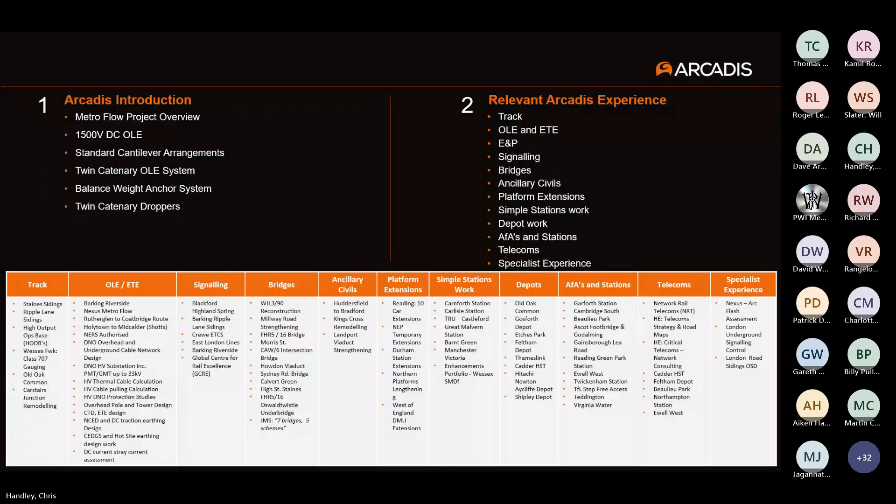Arcadis are experienced in the support of rail infrastructure delivery, providing all design services across all disciplines and stages. This presentation is going to be focused on the light rail project Metro Flow. So Arcadis were commissioned by Buckingham's to produce the Form A, Form B and AFC OLE designs for the Metro Flow project for the main client Nexus.

The role of principal designer was fulfilled by Buckingham's. The line was handed back to Nexus in December 2022 and services have been running since then. The project was named Major Project of the Year at the National Rail Awards and it scooped Outstanding Engineering Achievement at the Global Light Rail Awards. I'll briefly discuss the project aspects of 1500 volt DC OLE and some of the technical challenges we had.

The existing Metro tracks were dualled around the stations, so you can see Hebburn and Jarrow station, and they were dualled at the extents of the site too. So between those areas of dual tracking, the Metro tracks were just a single bi-directional line. The existing OLE in these areas was cabled between the respective OLE switches.

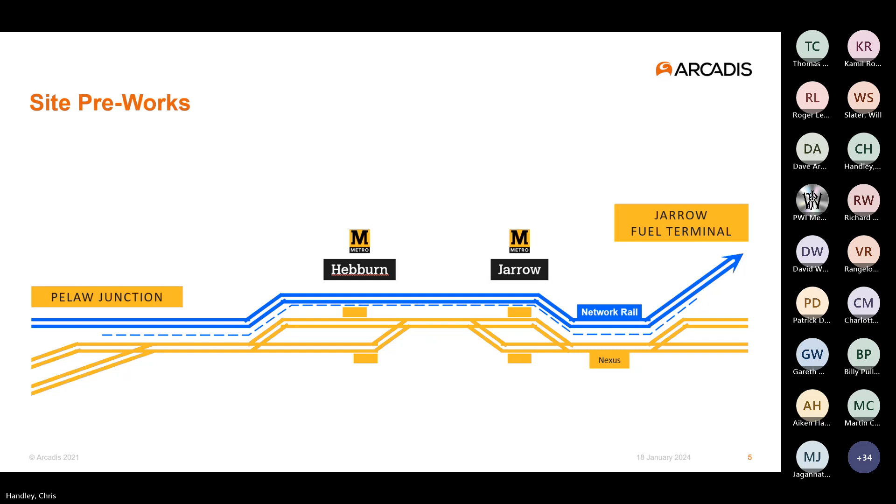For the project, the Network Rail line was to be incorporated into the Metro network to ensure that there is dual track throughout. So now the freight train services which run to the oil terminal would run over the Metro tracks. Five crossovers have been added through the route. This allows the freight train to cross to the other line between the junctions. It also allows for bi-directional Metro operation when the freight train is partially in the fuel terminal, the freight train being so long that when it goes to unload in the terminal, part of it would still be on the main lines.

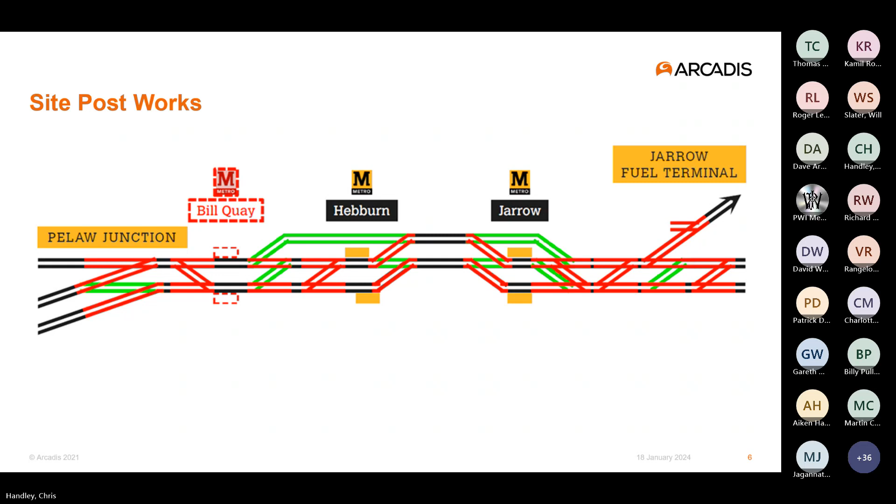So that was one aspect of the project, and another was to increase the system-wide weekday frequency of the Metro services to every 10 minutes. So some of the scope items that we went through for the project. The Nexus existing OLE system is 1.5 kilovolt DC OLE. They've got areas of heavy OLE, which is twin catenary between Pelaw and Hebburn, and then from Hebburn to Bede it was just the standard OLE with single catenary.

We needed to put new OLE over the former Network Rail line, new OLE over the new crossovers, and replace those cabled sections of OLE with aerial OLE. We had to renew the OLE on existing structures, so even if the existing mast and foundation were retained, we replaced the existing cantilevers. There was a slight increase in the OLE scope to include the renewal of the OLE through Bede station. So that just involved replacing the cantilevers and the wires.

To accommodate the freight train, which was W6A gauge, we had to increase the nominal contact wire height through the route from 4 meters to 4.5 meters. This was challenging around some of the low bridges, so we had to fit some of those bridges: Victoria Road, Station Road, which is in between the Hebburn station platforms, and Monkton Terrace. The track lowers at Monkton Terrace to accommodate the OLE were very high, 600 mil, and the track gradient there was like 1 in 65.

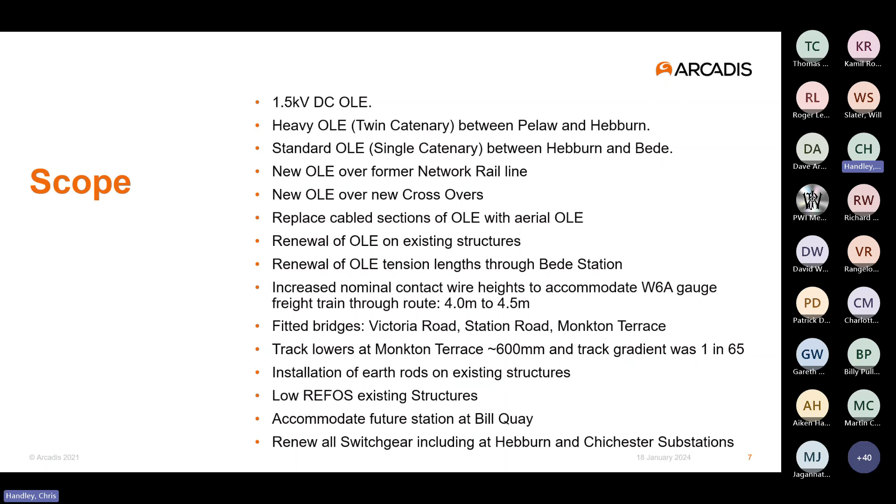Just some project info. So it was about 13 single track kilometres of OLE, 17 wire runs, 114 new structures installed with 48 existing structures removed, and 116 existing structures reused. And the route covered 3 existing stations, which were Hebburn, Jarrow and Bede.

So Nexus have their own set of standards which we needed to work to. So this includes the overhead current collection equipment technical specification, which covers standard OLE parameters, the bonding standard and system earthing policy. The overhead current equipment technical specification covers REFOSs, contact wire heights, grading, electrical clearances, pan sway and other parameters.

I just included there a snapshot of the section on the contact wire heights, which shows the differences between joint user and metro only tracks. So as you can see, the minimum height there where it's exclusively metro vehicles is very low, and we had to raise a lot of the wire heights to fit in the W6A gauge freight train.

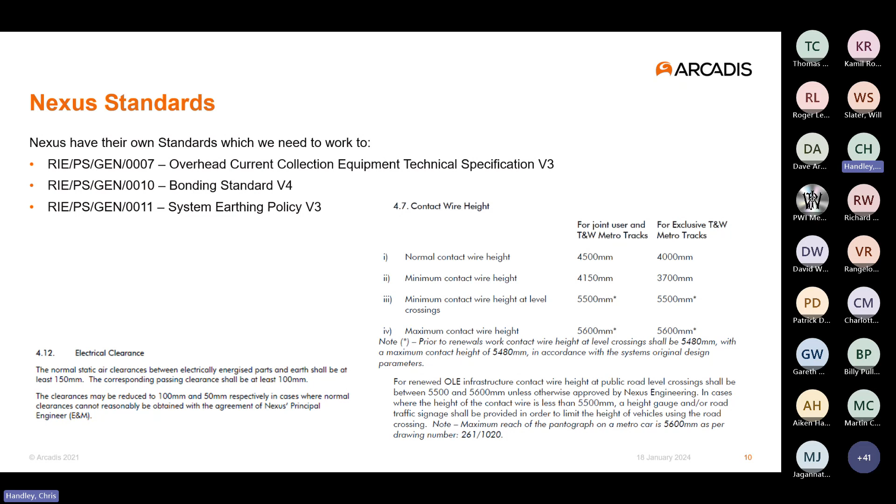So the new OLE that we used on the route was from the Siemens SICAT design range. So the existing Nexus OLE equipment and component record drawings are now obsolete. So we proposed the use of Siemens SICAT LD equipment, which is suitable for 1500 volt DC OLE with both double insulation and twin catenaries. This equipment has also been used recently on the Edinburgh Tram project. And there's just a snapshot from the Siemens product catalogue of one of the 3 kilovolt DC composite insulators.

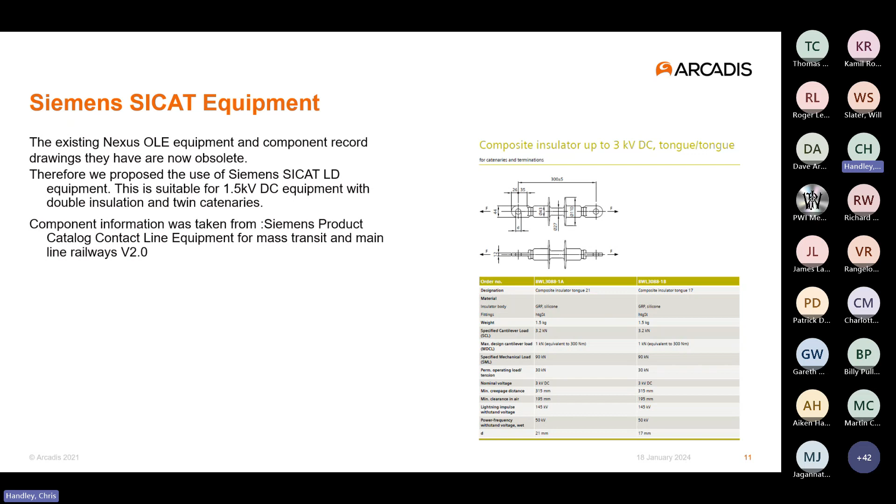So OLE structures can be single or double insulated. So here are 2 examples. The pictures are taken from Gosforth Depot. So single insulation is in the cantilever frame, where in that situation the mast is insulated from the ground and bonded to the traction return rail. So the mast is held in the concrete foundation with an insulated proforma.

So if there was a failure in the single insulation, the fault current would go back to the rail. And it also means that the mast, the OLE structure, is the same potential as the rail. So we were introducing double insulation in the area of works. So there are two ways we achieve this.

So one is you have primary insulation in the cantilever frame. Again, that's just the insulator by the mast, and then secondary insulation in the registration equipment. So this involved an insulated or GRP registration tube and an insulated catenary support. In this case, the mast is then earthed through the foundation, so it's just a piled foundation with the mast directly bolted to it.

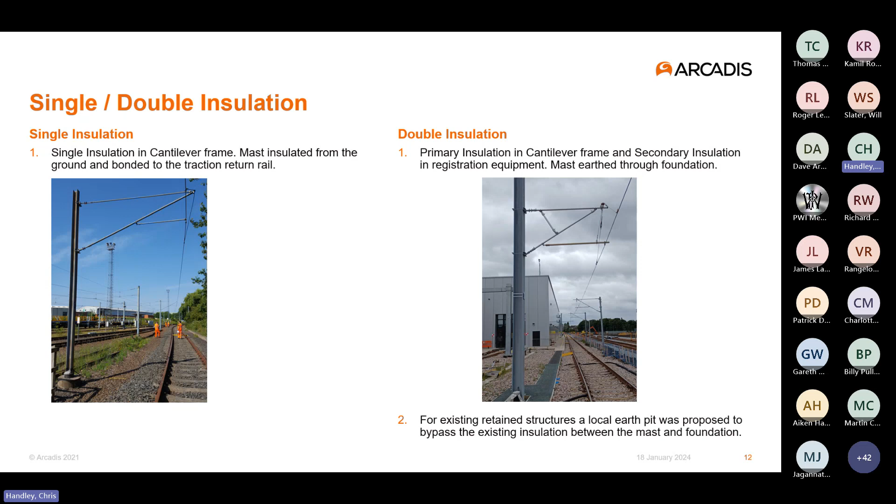So stray currents are another issue in DC systems. DC traction systems can cause stray currents which could adversely affect the railway concerned and outside installations when the feed and return circuits are not sufficiently insulated from earth. The major effect of stray currents is corrosion of metallic structures, where stray currents leave the metallic structure. There's also risk of overheating, arcing, fire, and subsequent danger to persons and equipment both inside and outside the DC electric traction power supply system.

So this is predominantly where some of the return current leaves the rail and would pass through an adjacent parallel metallic structure and then re-enter the rail after that.

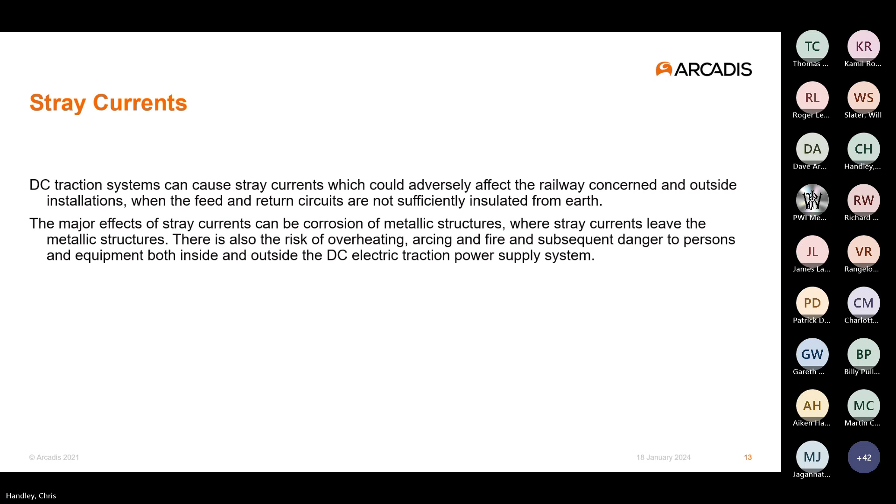So Siemens advised to keep a minimum angle of 1 in 3 in the diagonal tube. Then we drew them up with different back distance values to suit a range of reach values, ensuring clearance to the pantograph. So one of the effects of squashing the cantilever in this way is you need more variations in back distance, which suit a smaller selection of cantilever reaches.

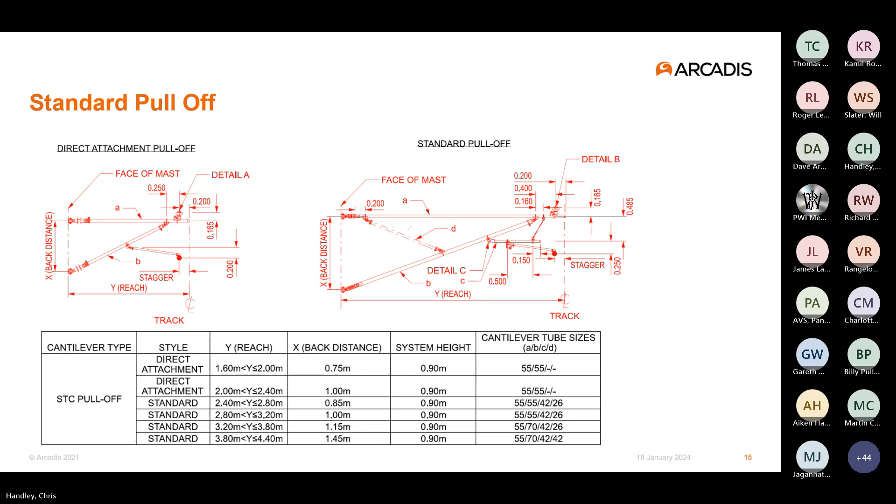And this is the pull-off cantilever arrangement. To ensure the buildability of the cantilevers on the detailed design cross sections, we showed additional details and notes which covered the components of insulator assemblies where the composite insulator wasn't suitable, and additional construction information.

So the cantilever selection details showing the direction of the eye clamps, and they denote, in the single catenary areas, which hole in the twin catenary clamp the single catenary goes into.

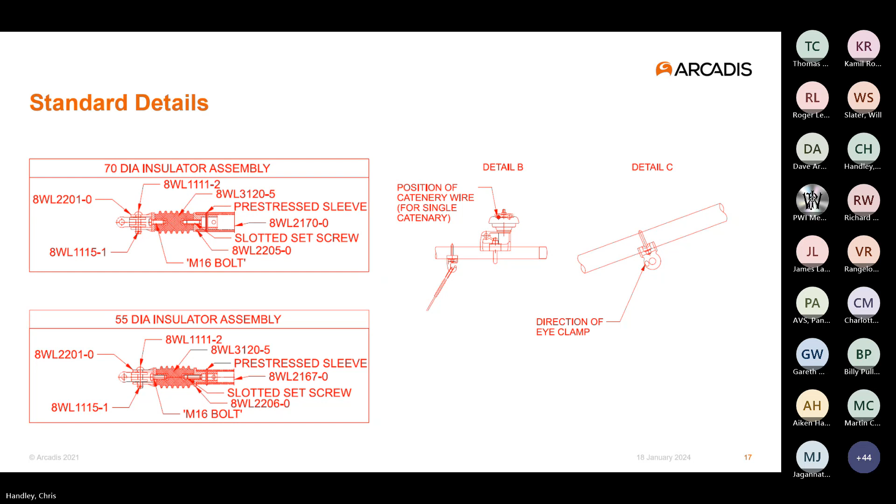So the twin catenary OLE system. We needed to replace the existing Nexus twin catenary OLE equipment. This had an additional catenary wire terminated into the centre of the compensating plate at a reduced tension to increase the current carrying capacity of the OLE. The main catenary and contact wire were nominally tensioned at 11 kilonewtons. However, over time, the tension in the wires has equalised with tensions as low as 5.9 kilonewtons measured in the contact wire.

A recent Nexus renewal project fitted a new termination arrangement to the twin catenary system, which divided the tensions from the existing balance weights slightly differently. So this gave 7.5 kilonewtons in each catenary and 6.5 in the contact wire. This arrangement was deemed not to provide enough tension in the contact wire for purposes of complying with deviation in the longer OLE spans.

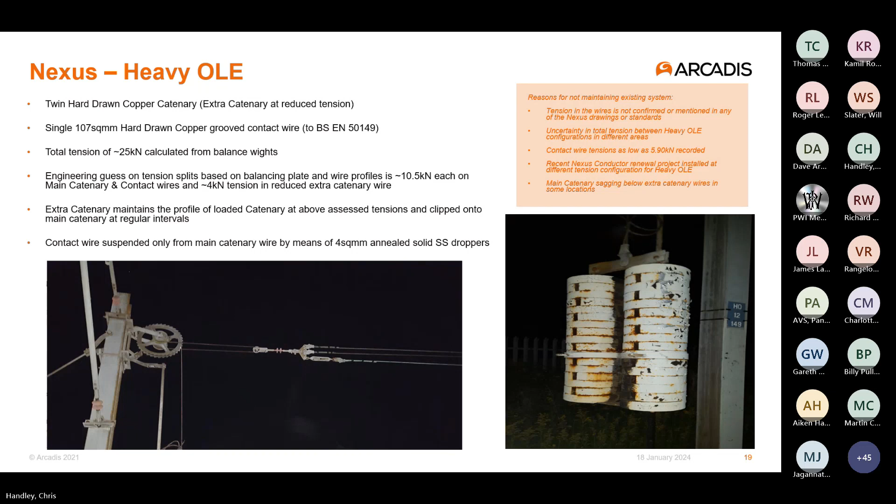So Arcadis proposed a new termination arrangement to avoid the issues with the legacy system. The twin catenary wires are terminated around a pulley to maintain equal tension in the wires. The contact wire and catenary pulley are now terminated onto a compensating plate for which we produced a basic design. So the compensating plate divides the tensions from the total tension provided by the balance weights into the wires. In this case, it divides the tensions unequally to give the required tensions in the catenary.

The twin catenary wires are separated by an offcut of contact wire attached to PG clamps, so they don't clash with each other. So in this new arrangement, both catenaries are tensioned to 8.2 kilonewtons and the contact wire is tensioned to 8.9 kilonewtons. This is a similar setup to the old Mark I system, which is suitable for line speeds of up to 120 kilometers per hour with multiple pantographs. So this is in excess of what Nexus required for their system.

The line speed in the area varies from about, I think, 60 to 80 kilometers per hour, and Nexus wanted to have provision for 20 kilometers of overspeed, bringing the total requirement to 100 kilometers per hour. So this arrangement and solution was presented to Nexus in workshops and then put in the OLE system description. At the detailed design, we did move one of the sets of insulators to the sleeper edge. As you see, it requires two for the double insulation.

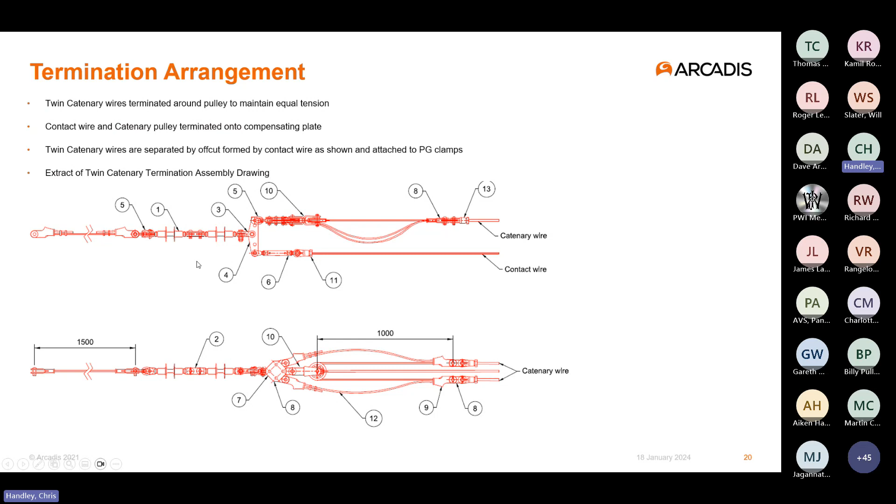So to provide tension to the twin catenary OLE system, we needed to produce a balance weight anchor system. The requirements are that the OLE has long tension lengths. As I say, the increased OLE scope meant that we had to renew 2 tension lengths through Bede station. Some of the existing half tension lengths were about 850 meters there. Through the rest of the project, the maximum was under 750 meters. But as per Nexus standards, we had to accommodate a large temperature range. So this included 40 degrees of current heating because the DC current tends to heat the wires more. This can lead to a lot of along-track movement.

As it's a metro system, the termination wire heights are also quite low. The nominal in-running contact wire height was about 4.5 meters, so the termination wire heights were maybe 5.2 meters. So the longest tension lengths required balance weight movement of over 3 meters. To accommodate this, we developed a balance weight anchor system to tension the twin catenary OLE system. This design has a twin weight stack to maximise the vertical movement of the weights. In some locations, we provided a rotated design to prevent gauge infringement or sighting issues, like the one on screen.

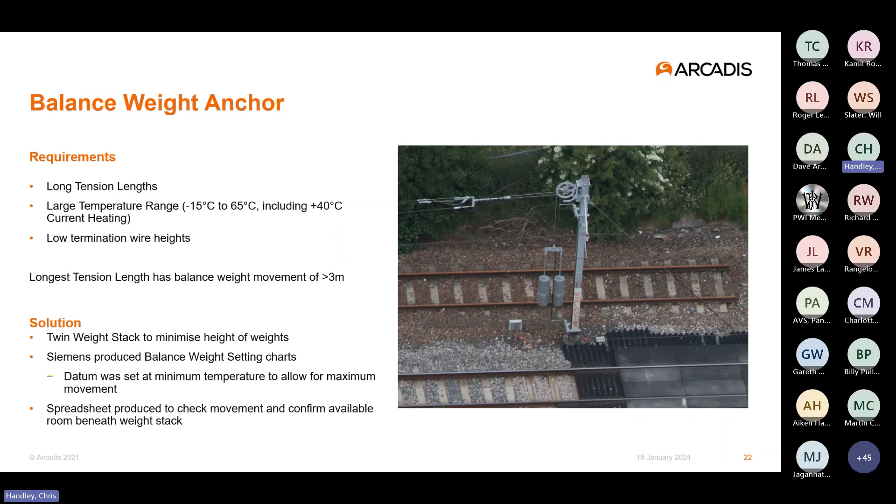Yes, this is just a photo of the old equipment that we've replaced. As you can see here, the equipment is over 40 years old, and over time the wires have stretched, and you can see the existing balance weights are in a single stack, and I think they're resting on the ground. So this would cause the tension in the wires to reduce as the temperature of the wires increases due to the balance weight movement being restricted.

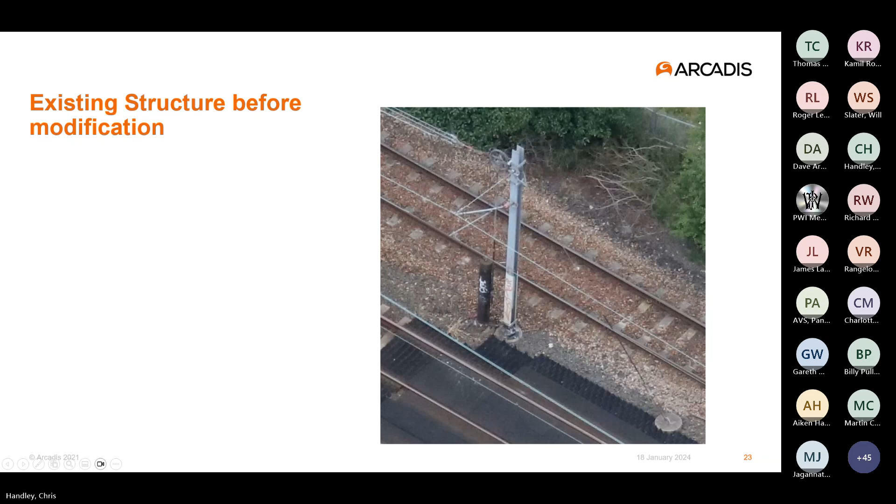So part of the twin catenary system was twin catenary droppers. Originally we wanted to allocate Arthur Flury twin catenary droppers. However, they were unavailable when we needed them. Therefore, we produced a basic design based upon Siemens SICAT components.

So Siemens already had a style for twin catenary current carrying droppers, but the dropper hoops were for larger 120mm squared catenary wires. So we produced a basic design where the hoop was made smaller to fit the standard 70mm stranded catenary wires.

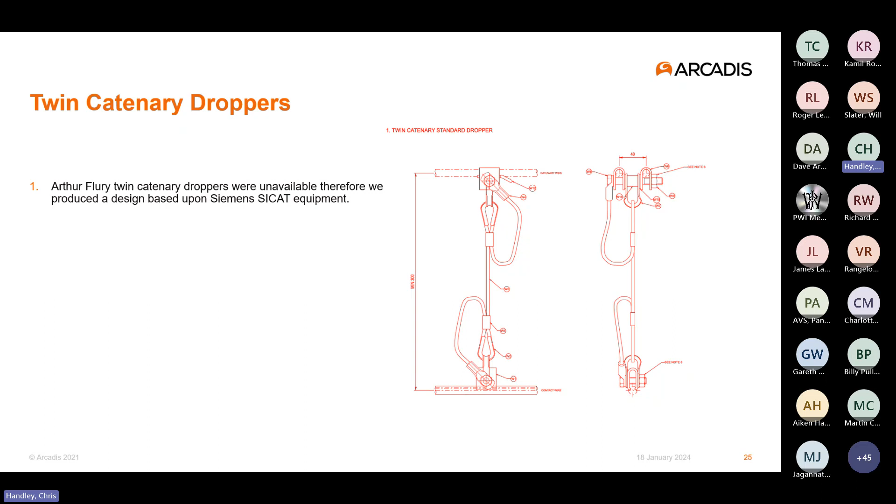For the reduced encumbrance locations, we produced another basic design, and this was based upon a design used in the Manchester Metrolink. So this had the contact wire clip supported by a V dropper, where both ends of the dropper wire connected to the twin catenaries. This design was presented to Nexus and amended to incorporate their comments.

So we changed the contact wire clip there to a sliding dropper clip, where this has a metal hoop that is a lot bigger, and it has a plastic insert, which is to reduce wear on the dropper wire.

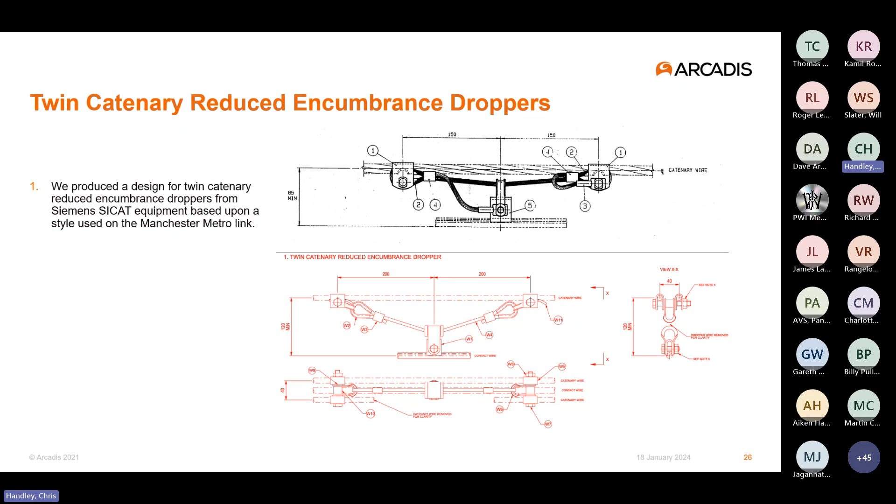So that is the end of what I wanted to talk about. Does anybody have any questions? Yeah, any questions at all? There's none in the chat at the moment.

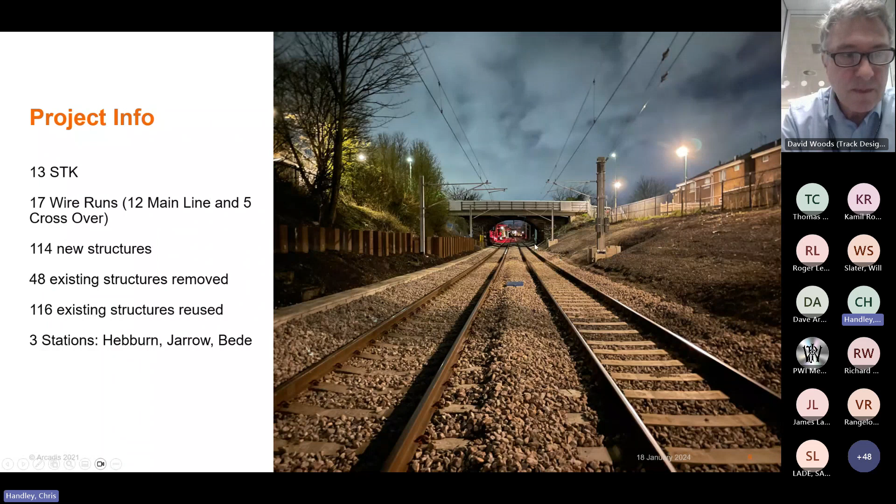I've got a general one just while people are thinking of one. The track lower you talked about, the 600mm. Was that a particularly troublesome structure? Could the structure be rebuilt or not? There were a number of discussions around this Monkton Terrace bridge about whether it's worth rebuilding the bridge or not. If I remember correctly, starting at low chainage, maybe a few hundred meters away there is an underbridge, so you couldn't reduce the height of the track there.

So that meant the gradient of the track had to be very steep when it went through the bridge to provide clearance to the closest face. The track gradient is so steep that there's a noticeably better clearance on the high chainage side, and you can see the effect that's had on the earthworks required in the area. There's a sheet pile wall on the outline side, and on the inline side there's just a graded slope there.

So the track lower there was about 600mm dig depth, which was the worst case, and the track gradient was 1 in 65. That caused some issues. When you've got very steep track gradients and changes in track gradient, you need to assess the vertical loading at each of the OLE supports to make sure it is downwards, because otherwise they wouldn't be able to achieve the contact wire heights that you're proposing, because the tensioned conductor won't be able to get down in the way that it is designed to be.